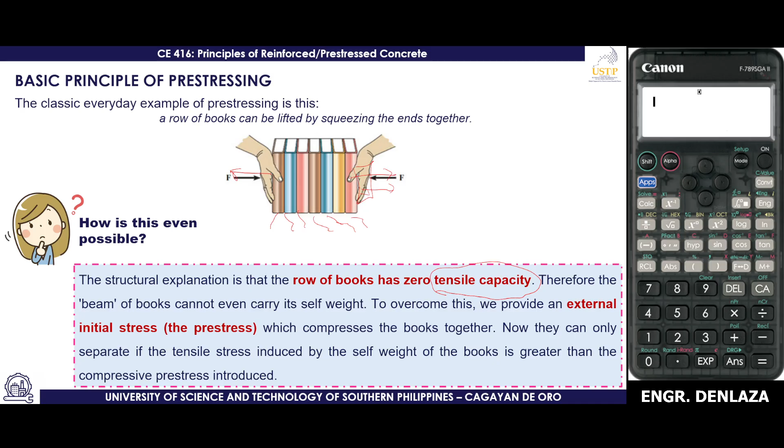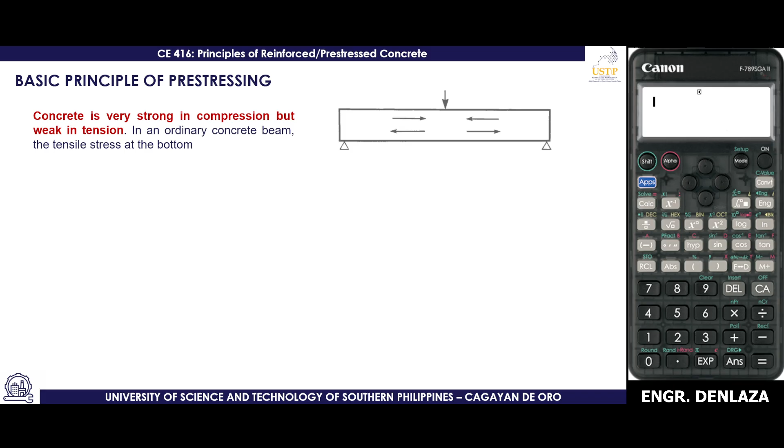We know that concrete is a very strong material that can resist compression, but it is basically weak in terms of its flexural capacity or tension. In an ordinary concrete beam, the tensile stress at the bottom looks like this, taken by standard steel reinforcement, and there is still cracking due to both bending and shear. This is the typical image of concrete subjected to different loads. So in pre-stressed concrete, because the pre-stressing keeps the concrete in compression, no cracking occurs. This is often preferable where durability is a concern.

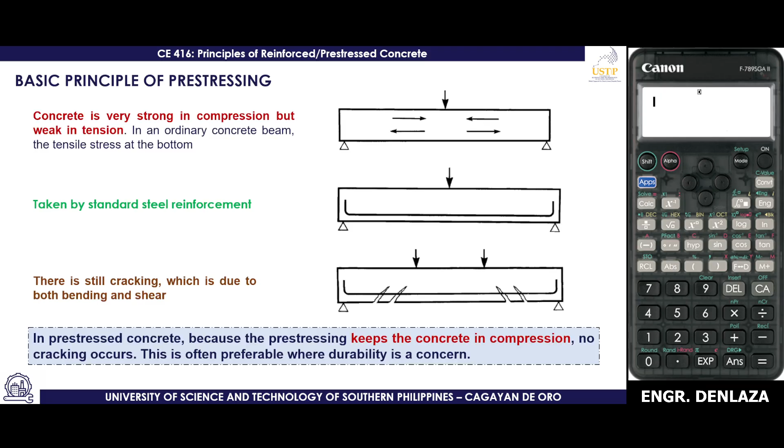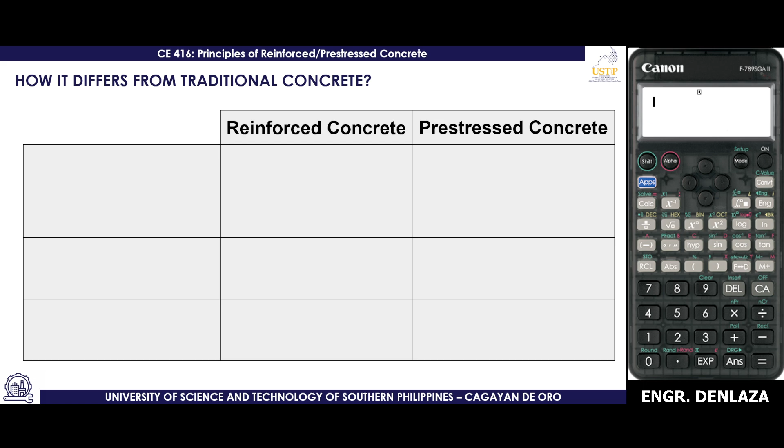So how does pre-stressed concrete differ from traditional concrete? I provided here a classical comparison. First is in terms of stress application, how the stresses are applied in reinforced concrete compared to pre-stressed concrete. In terms of stress application, rebars are used to resist tensile stresses, but the concrete itself still experiences tensile forces which can lead to cracking.

On the other hand, for pre-stressed concrete, the difference is that while reinforced concrete uses rebars, pre-stressed concrete also uses steel members, but they are now called tendons. The steel tendons are intentionally pre-tensioned or post-tensioned. You can actually pre-stress concrete prior to its curing, which is generically called pre-tensioned, or it can be pre-stressed after curing, which is called post-tensioned. That's the main difference.

So going back, the steel tendons are intentionally pre-tensioned or post-tensioned to create a compressive force in concrete, preventing cracks under normal conditions. On the other hand, in terms of structural efficiency, reinforced concrete requires shorter spans with larger member sizes.

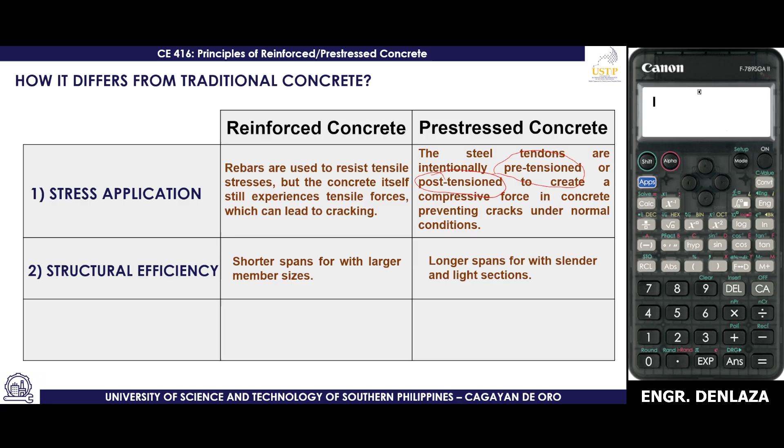In terms of load-bearing capacity, reinforced concrete, compared with traditional RC, begins to develop tensile cracks at relatively lower loads. So when you compare plain concrete to reinforced concrete, reinforced concrete is better. But when you compare traditional RC to pre-stressed concrete, pre-stressed concrete is better than RC—it allows the member to carry greater loads before cracking or failure occurs. So the hierarchy in terms of material is: plain concrete at the bottom, second is reinforced concrete, and third, topmost, is pre-stressed concrete.

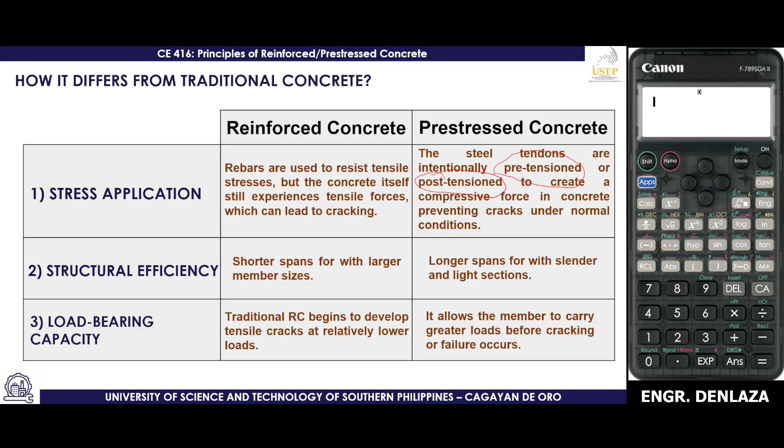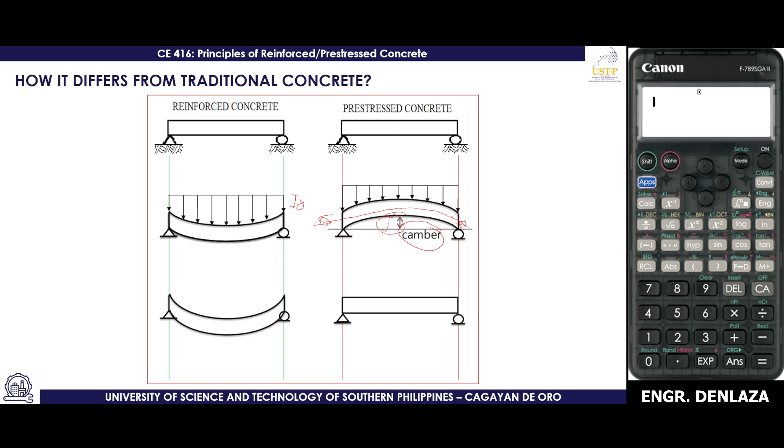So how does it differ from traditional concrete? If reinforced concrete is loaded, it tends to deflect. What is done with pre-stressed concrete is that it is cambered ahead of time, using tendons—pulled here and there, pushed in. After that, it now has a certain distance built in. If that pre-stressed concrete experiences a downward load, it balances out until it experiences little to no deflection, unlike traditional reinforced concrete. So that's the basic gist of the differences between RC and pre-stressed concrete.

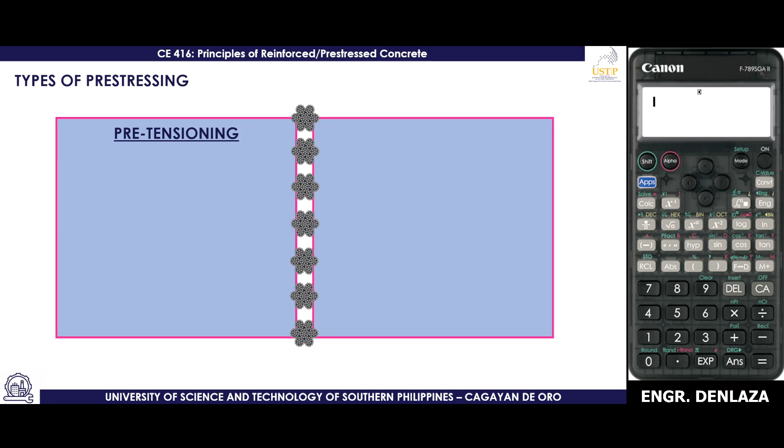Again, as I was saying, there are several types of pre-stressing, different kinds. There are two types of pre-stressing: pre-tensioning and post-tensioning.

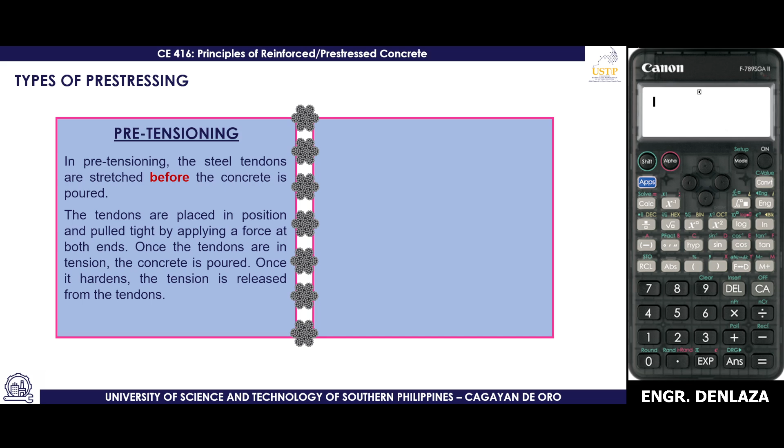In pretensioning, as I explained to you before, the steel tendons are stretched before the concrete is poured—that's the keyword, before. Before pouring or curing, the tendons are pre-tensioned. The tendons are placed in position and pulled tight by applying a force at both ends. Once the tendons are in tension, the concrete is poured, and once it hardens, the tension is released from the tendons.

On the other hand, post-tensioning is where the steel tendons are stretched after the concrete is poured—the keyword there is after. The steel tendons are placed in ducts or tubes within the concrete structure before the concrete is poured, but they are not tensioned until after the concrete has cured. Once the concrete has hardened, the tendons are pulled using hydraulic jacks and anchored to the concrete at both ends.

Actually, I have real experience handling pre-stressing. What I experienced being pre-stressed was piles. For the piles, we did post-tensioning. I also experienced pre-tensioning for girders on a bridge—so for post-tensioning it was piles, and I got to experience both, though I sometimes get confused between the experiences. Anyway, the gist of it is there are hydraulic jacks that pull until it reaches a point where it makes a 'boom' sound, and that's the time when the post-tensioning is done.

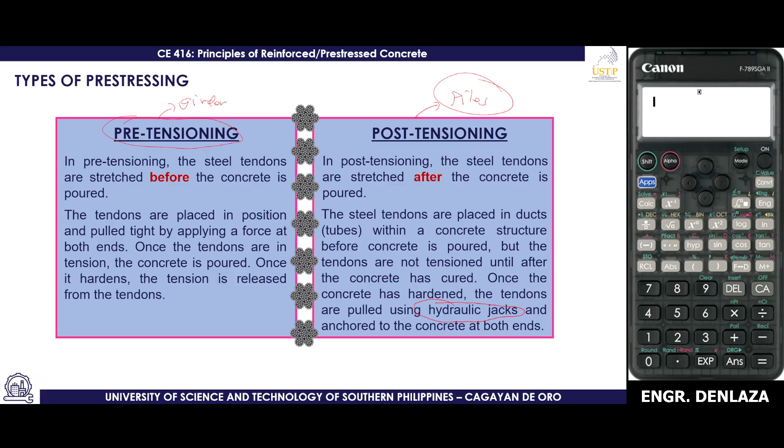In the next slides I'll show you images related to this, to explain these samples. For pre-tensioning, these are the parts: this is the pre-stressing bed where you pre-stress, typically shown as an image of a pile. There's the steel tendon, shown in red, which is actually pulled. Then there's the concrete that holds it, and a circular or square part which is the hydraulic jack that holds the tendon and locks it in place. So the process is: applying tension at the tendons, casting the concrete, transferring the pre-stress, then cutting the tendons. In real life, the tendons are actually very large.

As far as I can remember, I handled pre-stressing before, sa Molugan, El Salvador. Whenever you do pre-stress, usually before proceeding, you need to inspect the reinforcement, aside from the pile, the tendons, the cage reinforcements, and as well as the spiral itself. So during inspection, you check the spacing, the diameter, that's what it senses.

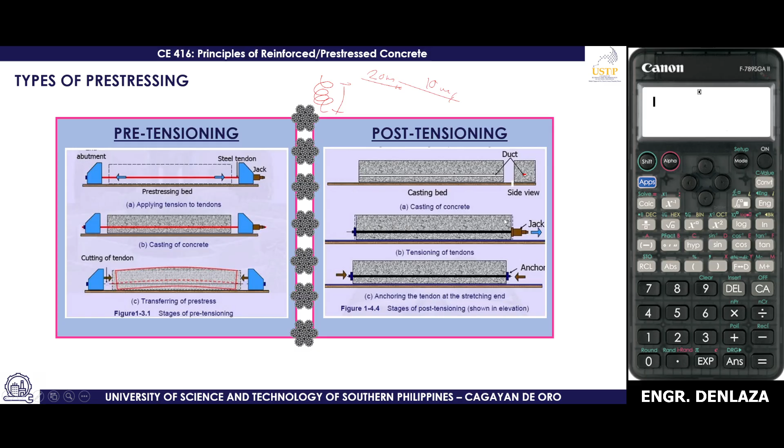In comparison to post tensioning, going back - there's a casting bed, then a duct where the tendon is inserted. Then casting of concrete, similar process, then jacking, etc. So that is the typical process of post tensioning.

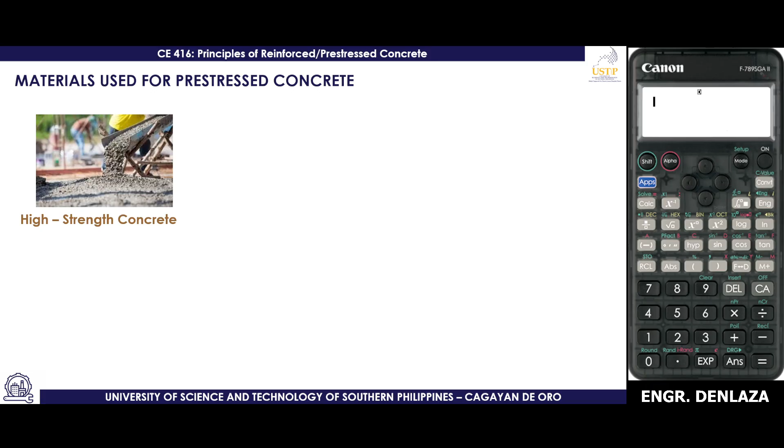Materials used for pre-stressed concrete: obviously high strength concrete, and then the tendons that I'm talking about. If you will ask me what a tendon looks like, here is its appearance.

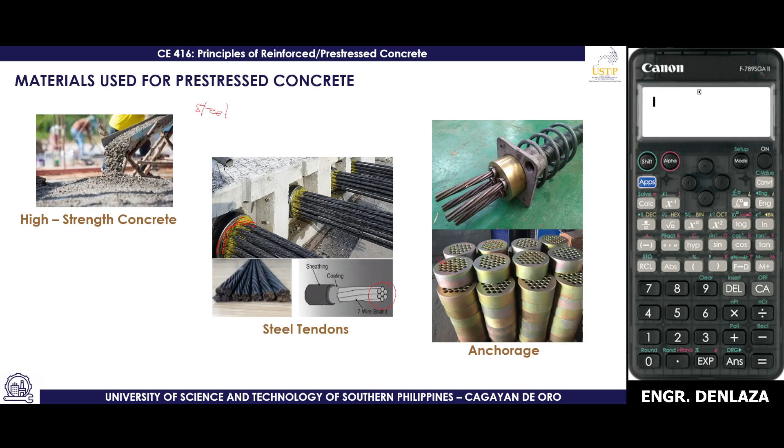So here are the parts: the tendons, depending on how many pieces are required, and then the coating and sheathing. Here are the other parts, the anchorage. The anchorage is where the tendons pass through, depending on the number of tendons required by the design. And then lastly is the grout.

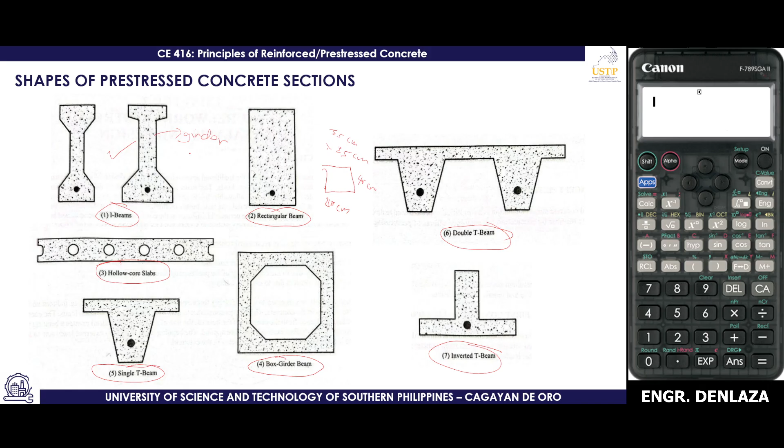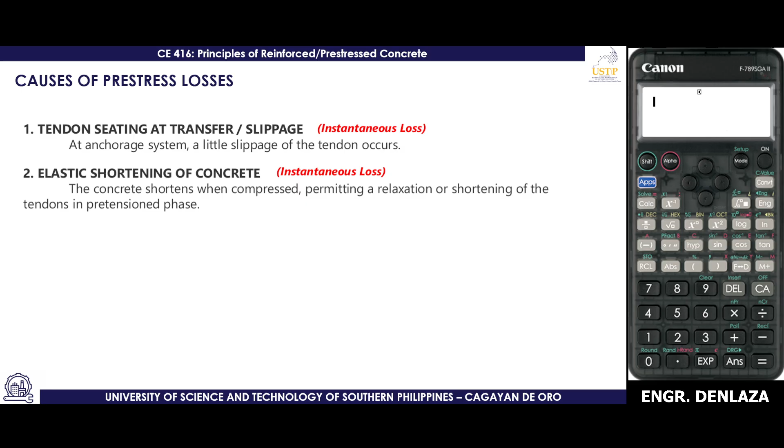We also have elastic shortening of concrete. The concrete shortens when compressed, permitting a relaxation or shortening of the tendons in the pre-tension phase. And then shrinkage, which is a time-dependent loss over a long time. Shrinkage loss is approximately 7% in pre-tension and 6% in post-tension.

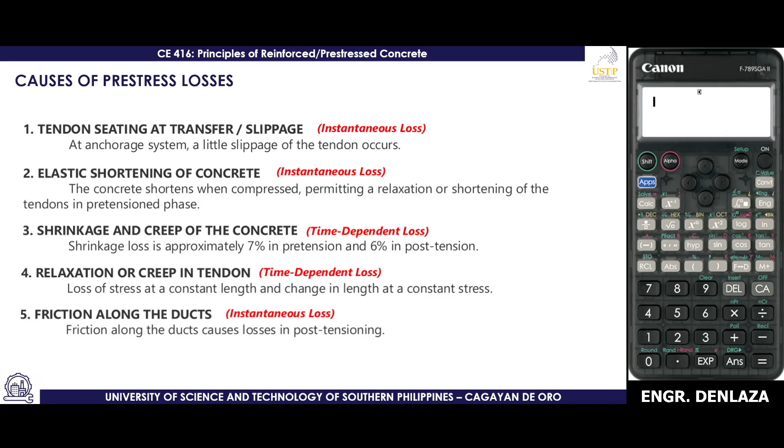We also have relaxation or creep in tendon, which is still time-dependent loss - loss of stress at a constant length and change in length at a constant stress. And lastly is friction along the ducts, which causes losses in post-tensioning.

There are several methods in analyzing and designing pre-stressed concrete. First is the basic concept: concrete fiber stresses are directly computed from the external forces applied to the concrete by longitudinal pre-stressing and the external transverse load. So if this is your rectangular beam, you have an axial load, and that axial load has a moment which is P times E, or eccentricity. Eccentricity by definition is the distance from the centroid to the location of where your actual load is acting.

So in a rectangular setting, we have the stress strain diagram on pre-stress. First is axial forces. The behavior here is that since this is axial, whenever it goes inward, downward, that's negative.

From the bottom of the fiber, that's negative, and at the top, that is positive. So you add the pre-stress force, and the pre-stress force has this mechanism wherein at the top fiber it's positive, and at the bottom fiber it's negative.

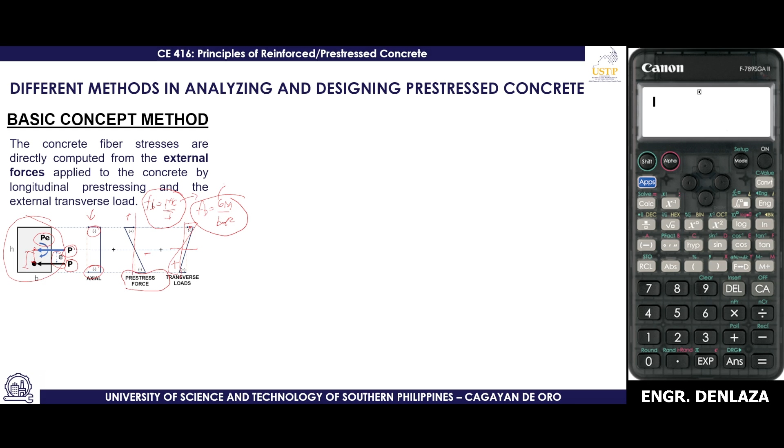So I hope you're familiar with the bending stress formula, which is MC over I. Since this is the generic equation applicable to rectangular and even non-rectangular sections, we also have what's called the bending stress formula, which is 6M over BD squared, a derived formula only applicable to rectangular beams.

So if you know that the problem you're solving is a rectangular beam, you can just use 6M over BD squared. But if it is a non-rectangular beam, you use MC over I, where moment times C, or the depth of the neutral axis, and I is the moment of inertia.

So one way of looking at this is my notation: basically if it's on the left side, it's positive, and if it's on the right side, it's negative. But again, it's reversed for pre-stress or transverse loads, because for pre-stress the top fiber is positive and the bottom is negative, while for transverse loads the bottom is positive and the top fiber is negative.

Then the other method is called the C-line method. It considers the line of action of the resultant compressive force in the concrete such that the induced stresses remain within allowable limits and tension is minimized or eliminated.

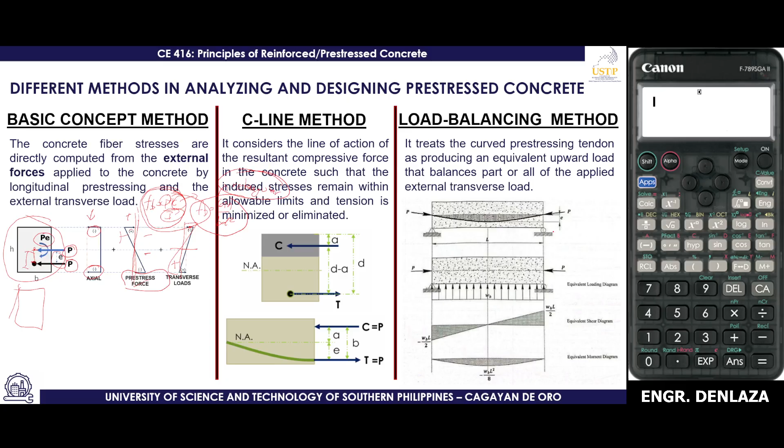So here's the diagram for that. And lastly is the load balancing method, where you have the diagram of your uniform load, then the shear diagram, and then the moment diagram. For board exam purposes, we'll focus on the basic concept method since that's the one that usually comes out in the board exam.

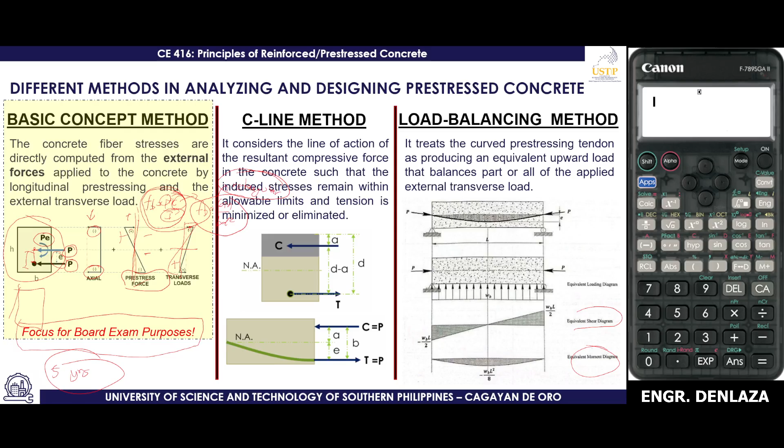So these are the ones. This has been coming up in the board exam for the last 5 years. So obviously if you take the boards, this topic will probably come up under RC.

So under the basic concept method, for pre-stress, the sign convention is: if it's going towards the perpendicular area, that is negative, or it indicates compression. If it's going away, that is positive, or tension.

So are you familiar with the smiley face? Basically, if it's smiling, positive at the bottom is tensile, and negative is compressive. That is the positive bending or the sagging. But if it's the other way, that is now the negative bending, where the top fiber is now positive, and the bottom fiber is now experiencing negative compressive stress.

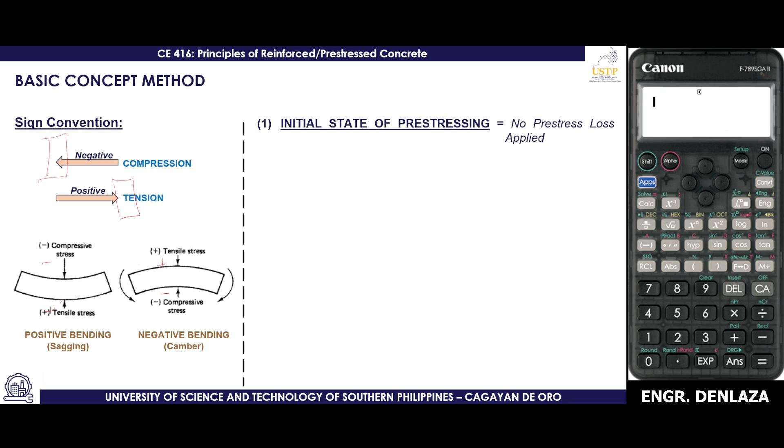So for the initial state of pre-stressing, there are actually two states, initial or the final state. In the initial state of pre-stressing, basically no loss of pre-stress has been applied yet. So all you have to do is just add the combined stress due to the pre-stress force plus the flexural stress due to beam weight, whenever it is applicable.

On the other hand, when it is in the final state of pre-stressing, the pre-stress loss is applied, so we add a multiplier where you take the percent loss and subtract it from 100% or 1. For example, if the pre-stress loss is just 8%, that's 1 minus 0.08.

So that's it. And take note, the combined stress due to pre-stress force is composed of the axial and also the pre-stress force. So these will just add up, depending on whether you are considering the top fiber or the bottom fiber.

Then that's the time that you will be adding for the transverse load, the flexural stress due to the service loads.

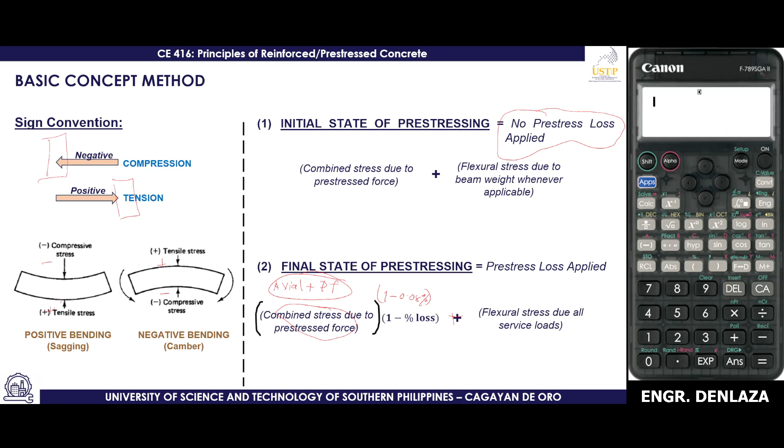Again, this is your beam, the neutral axis. This is where your axial load is applied, that's the P. So again, the distance coming from the centroid, right, since the centroid is at the middle, the distance from it to where you apply the P is what's called the eccentricity.

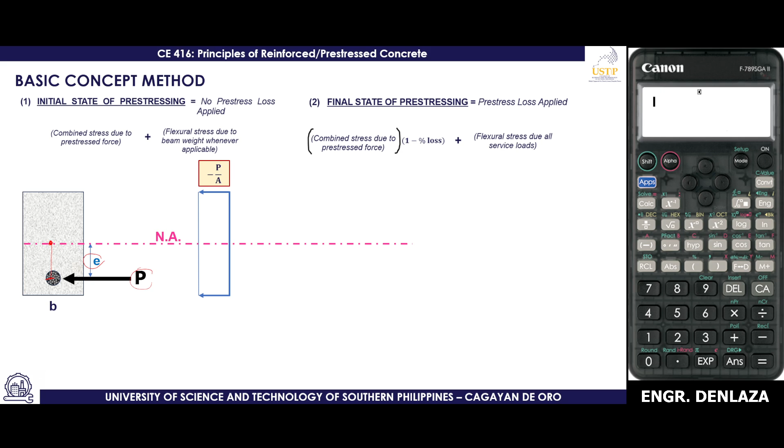For the eccentricity, this is the uniform distributed load allotted for the axial load itself. So again, the top fiber is now negative P over A, and the bottom fiber is also negative P over A.

This is just for axial loads. I'll just indicate, basta axial load ni siya. Axial loads. Now, pag moingon na pud ka og pre-stress loads, pre-stress na pud ni siya. Sa pre-stress loads, as I was saying, basta top fiber is positive and then bottom fiber is negative.

Now, as I was saying, di ba kay MC over I man to. So since in this diagram it is a rectangular beam, pwede ra na siya nga 6M over BD squared, if rectangular. Okay, ano siya, if it's rectangular. Kay if it's not, then mag MC over I pa gihapon mo.

And lastly, okay, so if you would notice, PE ang gigamit dire because P times eccentricity is just force times distance. Di ba? Force times distance. So force times distance is just basically moment, maura na siya, moment.

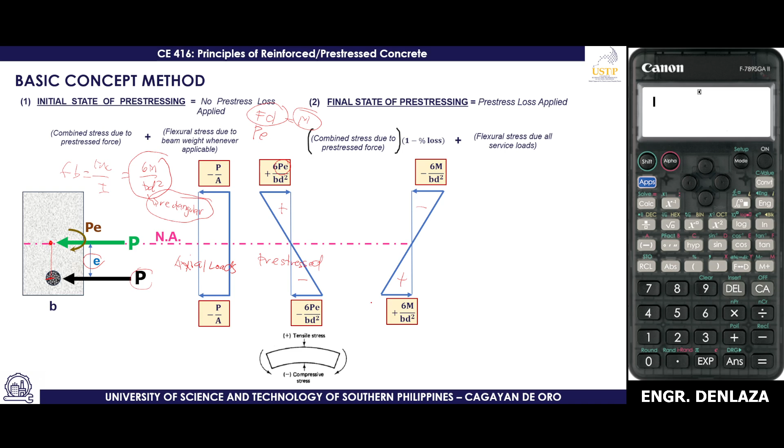So in this case, since this is positive, ang nasa taas, and then bottom is negative, so it is actually negative bending, si pre-stress. And lastly, in this case, this is now positive and this is negative, 6M over BD squared, pareha na siya, negative 6M over BD squared. And this is now positive ang iyahang bottom fiber and then negative iyahang top fiber.

So if you are interested in getting the total stress, all you have to do is just to add. If interested ka sa stress at the top, i-add lang nimo sila kani, kani, o kani, including the signs, okay? So the formula is just the stress at the top fiber is equals to negative P over A plus 6PE over BD squared minus 6M over BD squared.

If you will compare it to the bottom fiber, that's FBOT, or FBOT is negative P over A, kanina pwede mo i-add kani and kani. So that's negative P over A minus 6PE over BD squared plus 6M over BD squared.

So take note guys, this is only applicable for rectangular sections because ang atong gigamit diri is 6M over BD squared, which is the bending stress for rectangular beams, as well as here. Pero if it's not, then makagamit gud mo og equation nga MC over I. And take note, C over I, familiar di ba mo, that is also same sa section modulus nga I over C, so interchangeable. Take note lang mo kay makagamit na later po.

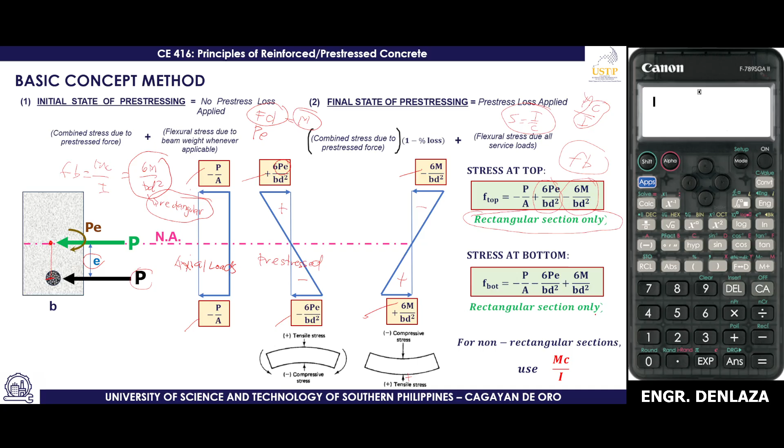Section modulus. Okay, as I was saying, for non-rectangular sections, you will have to use the MC over I nga formula.

So, basic concept method, tendon profiles: concentric tendon, which is nasa sa tunga, and then we also have eccentric tendon. So most of the time kani man o kani ang gagawa sa boards, guys, concentric tendon and as well as eccentric tendon. So pasabot na siya, eccentricity, ang iyang load kung asa siya nag-act is not in the geometric center. And then we also have parabolic tendon and we also have harped tendon, tendon or the pretension, post tension.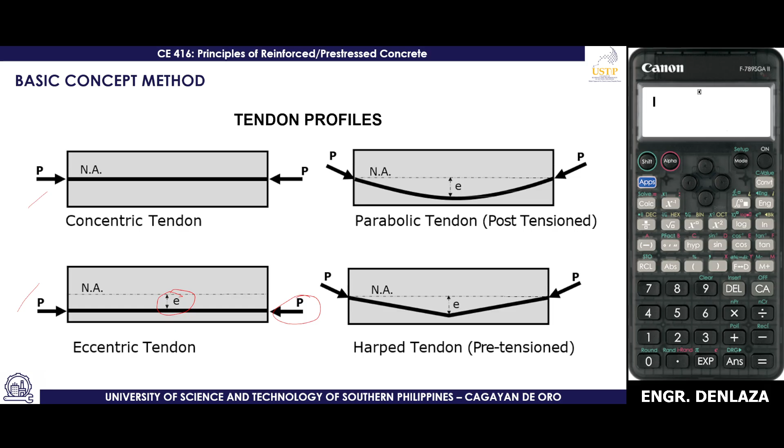So let's go to sample problems na, no? Okay, sample problems. Number one: calculate the top and bottom stresses felt by the pre-stressed concrete beam under initial state and final state, at midspan section. So the dead load is 24.8 kilonewton per meter and live load is 11.4 kilonewton per meter. The pre-stressing force is 1950 kN applied at 175 mm, that means away from the neutral axis, eccentricity day na siya. Assume 8%, take note, that is the pre-stress loss.

So that's 1 minus 8% day ang magamit unya if we are solving for the stress. And then take note, naa tay gihatag nga specific gravity of concrete. So SG is unitless. So since this is SG, kinahanglan tag unit weight of concrete, unit weight which is 9.81 kilonewton per meter cube. And then obviously you will have to multiply it with the specific gravity, and then since this is m cube, you will be needing an m squared.

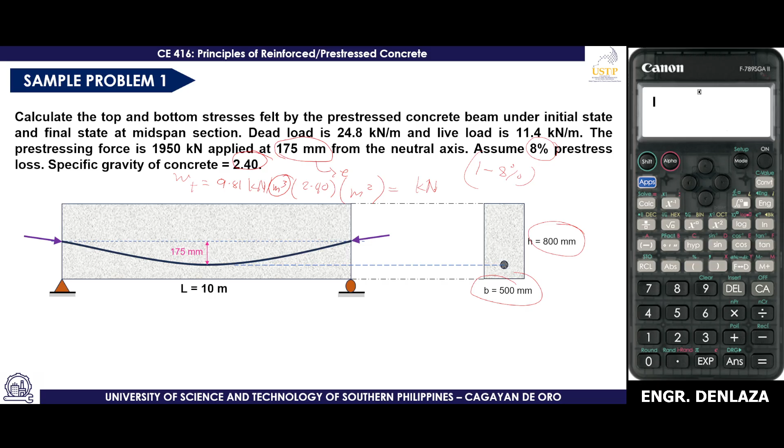So what is the m squared that can be used here? Obviously that's the base times height. Ina na lang siya in order for you to get the weight of the beam or the self weight in terms of its kilonewton per m na siya.

So the solution for the initial state, take note at the top fiber, this is the diagram. So that's negative P over A, positive 6PE over BD squared, and then negative 6M over BD squared.

The solution should still require you to get the weight of the beam, because we don't have any moments yet, we need the moment. If it's simply supported, that's just WL squared over 8. But the question is we don't have W, which is pertaining to the weight of the beam. How do we obtain the weight of the beam? It's just unit weight times SG times area of concrete, so the answer comes out in kilonewton per meter.

That's 9.81 times specific gravity times 0.5 meters and then 0.8 meters. Simplify that and you get 9.418.

So stress at the top is negative 1950. Take note, since this is in kilonewton, that's obviously times E3 or times 1,000, all over area, which is 500 times 800, plus 6 times 1950, and take note that's E3, and eccentricity of 175, times P, all over B times D squared, where D squared is the height.

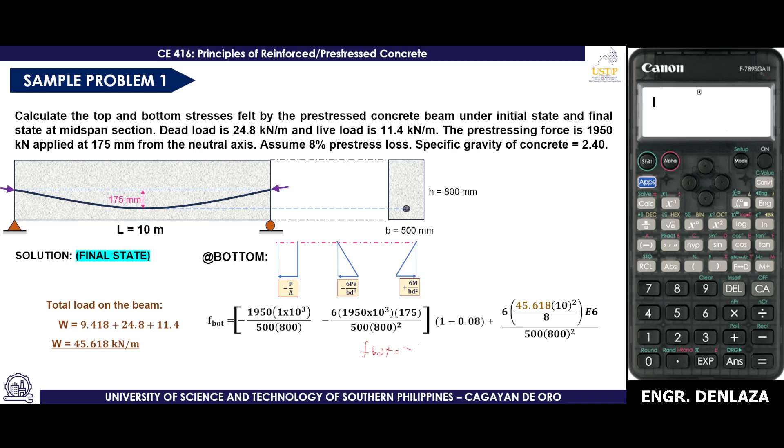But what you do is make it F bottom equals negative A, negative B, times 1 minus 0.08, plus C. So that's the equation for F bottom.

So take note that you should not forget the multipliers — since this is in kN, times E to the power of 3, or 1,000. But if it's in moment, take note it's E6, because that's 1,000,000. Right? Don't forget that.

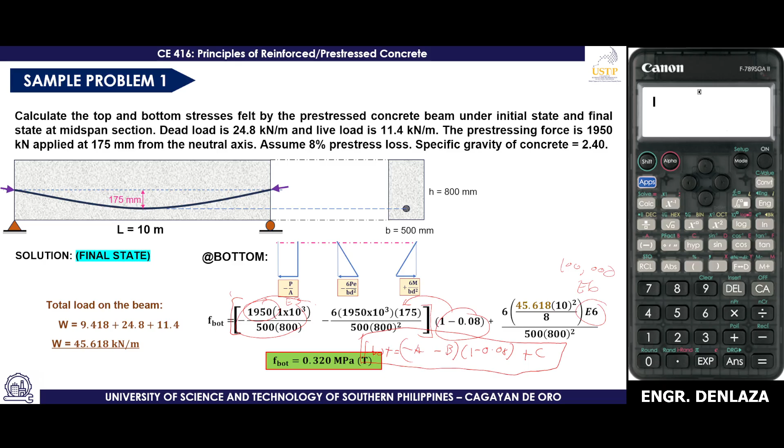So again, our final answer for the final state is 0.320 MPa in tension — it's positive, indicating tension.

Okay, that's it. Example number 2. So we have a beam with dimensions 400 by 750, and a length of 12.

The prestressing force is 2,100, applied 250 mm below the neutral axis. Okay, then we're given the unit weight.

So unlike before where specific gravity was given, now unit weight is given, so you just multiply it by the area in square meters, which in this case is 400 times 750.

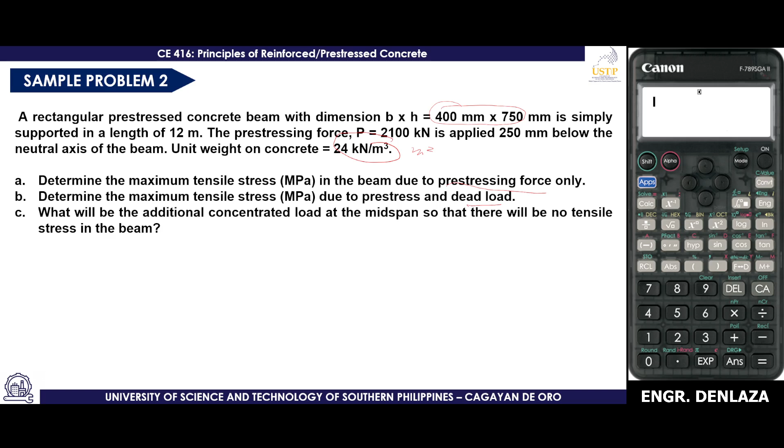What we need to find is the tensile stress at the beam due to the prestressing force, the initial prestress and dead load, and then what additional concentrated load at midspan is needed so there will be no tensile stress in the beam.

For the first problem, let's illustrate it. So this is the illustration with the load and the beam dimensions.

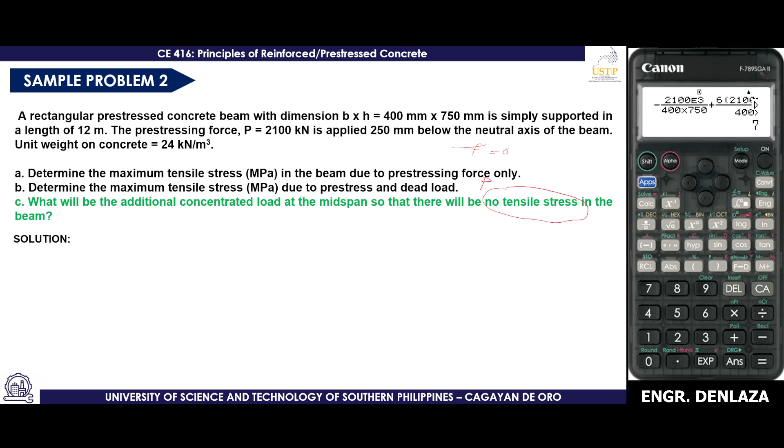So mga ulahi ang mga animation, pero as I was saying, ato na tong top nga equation ani. So nganong unknown man si M? Wait lang, ako lang ipakita sa inyo.

This is a maximum moment due to a point load. Pero pasabot, katong inyong nabaw-an nga M max is equals to WL squared over 8, this is only applicable if it is uniformly distributed. Pasabot ana, ingon ana na kay mga load, di ba? Ngayon ang kani nga problem tells us nga unsa man, point load lang ang present. So what is the maximum moment of a point load? That's PL over 4. So the maximum moment is PL over 4 of a concentrated load acting at the midspan.

Mao na siya. So as I was saying, dapat 0 si F-top. Kay mao may giingon sa problem nga 0 daw kuno si F-top. Let me just edit the animation earlier kay nagkalanrakas.

So as I was saying, we need to get this. So we need to determine why we have the maximum moment formula of a concentrated load, because your question is about additional concentrated load, which is present in the M variable here. So with F top equal to 0, substitute, simplify, and you should get 6 times M, which is P times 12, then over 4, and don't forget to multiply it with E6 because this is still a moment, then all over 400 times 750 squared, and you will get 44.25 kilonewton for this problem.

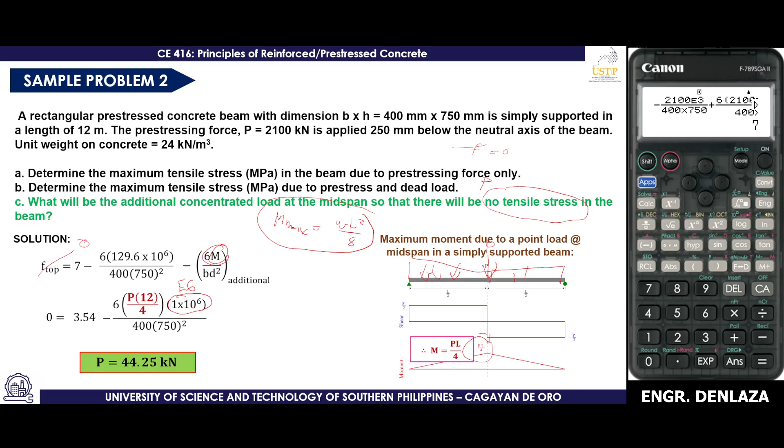Third problem: the section of a pre-stressed double T concrete floor joist is shown in the figure. The pre-stressing force in each T is 750, and since it's double T, that means 2 times 750, or 1,500 kilonewton. The unit weight of concrete is 23.5 kilonewton per cubic meter, and the simple span is L equals 8 meters.

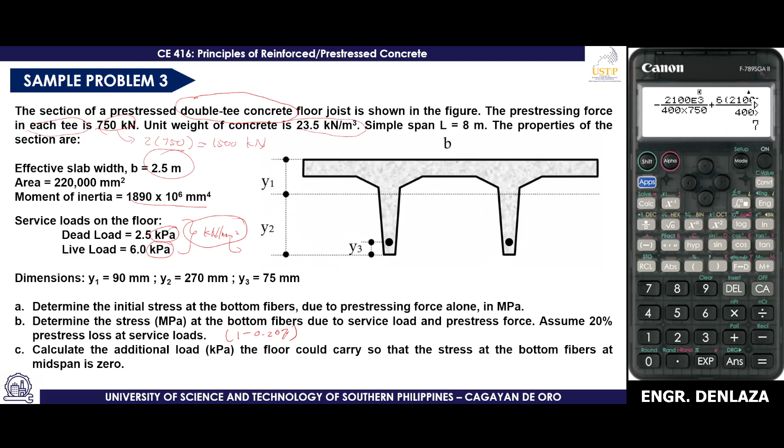We are to determine the initial stress at the bottom fibers due to pre-stressing force alone, and also the stress at the bottom fibers due to service load and pre-stress force, assuming there is a 20% pre-stress loss at service load. That means you multiply 1 minus 0.2, or 20%, by your pre-stressing load to get the actual load. Then calculate the additional load the floor could carry so that the stress at the bottom fiber at midspan is 0. So we substitute those values into y1.

So as you can see, this is now our new dimension. Take note, since it is acting here, our eccentricity is just 270 minus 75, which is 195 from the bottom fiber. Let's take note of our stress-strain diagram. F-bottom is what we're interested in, since that's the question. So that's negative PA, negative 6PE, initial stress, all over BD squared. Let's focus here.

So that's negative PA. Take note, obviously we cannot use this equation because this is not a rectangular beam. Instead, since we already have values for C and for inertia I, we can use this formula instead.

Wait, there seems to be some distortion happening. Wait, it's not deleted. Let me just edit this one.

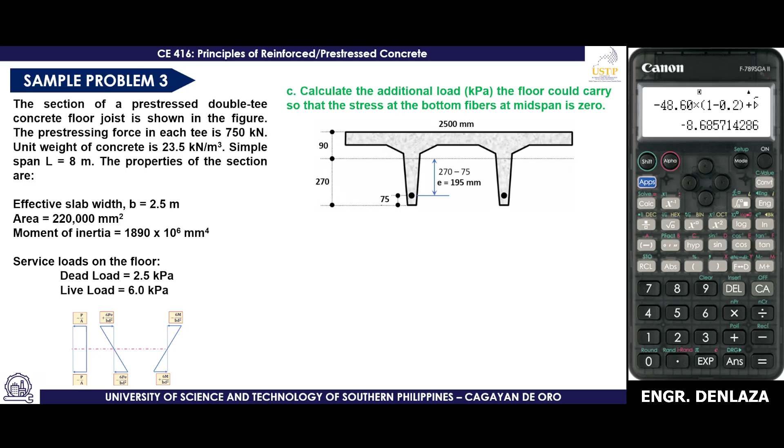So para positive itong ma-display, you just have to indicate the C, which is indicating that it is compression. Then lastly, calculate the additional load the floor could carry so that the stress at the bottom fibers at midspan is 0.

Additional moment at bottom stress to be 0 at midspan, F bot equals negative 8.69 plus MC over I. So, M, 270. Take note na lang ani, ayaw mo kalimot, butang og E6 ani. So, M E6 times 270 over 1890 E6 para makuha ninyo ang value. Dapat na siya E6 diri. I-edit na lang nako.

And then additional uniform load, WL squared over 8, that's W, 7.60, and that's kilonewton per M. Kinahanglan mong kag-additional load nga KPA siya. Okay, so that's gonna be 7.60. The unit should be KPA, that's kilonewton per M over M. So obviously, my numerator, so that's why M squared. Okay, so that's KPA. Gets.

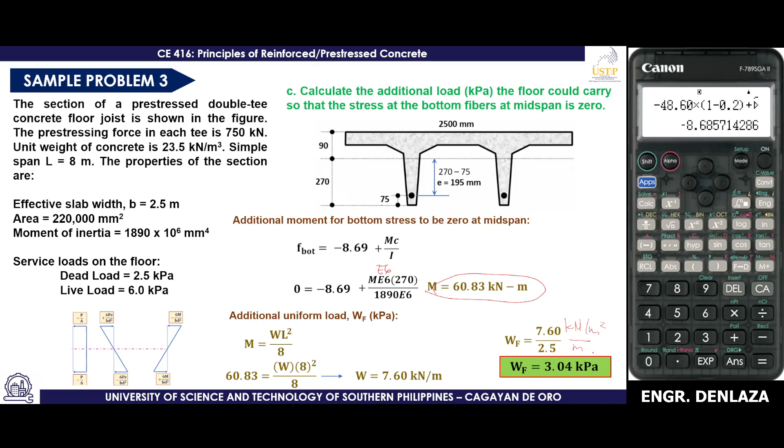Okay, sample problem 4 na ta guys. Last 2 na lang. Last 2 problems, sorry. Maburo mo tayo din, eh. Wait lang, kaya naglag.

So, naatay pre-stress sa hollow core slab. Use SE library flooring. Naa siya overall span of 10M. Naa siya pre-stress loss of 15%. And then we also have A 1.5, B for the depth, it's 250. And then cross-sectional area, take note na lang tayo bagong value diri, it's the section modulus.

As I was saying earlier, the bending stress is actually MC over I. And then take note, familiar C over I. This is actually similar sa section modulus SX, which is I over C. So, if i-flip nimo, pwede na siya magamit. So, technically, kung naa tay value for section modulus diri, pwede na other term din niya, FB is equals to M over S. Other formula for bending stress.

So, I think na-encounter na ba ninyo? I think sa MDB, na-encounter naman ninyo sa MDB. And I think makarepeat pa pod mo ani sa steel design.

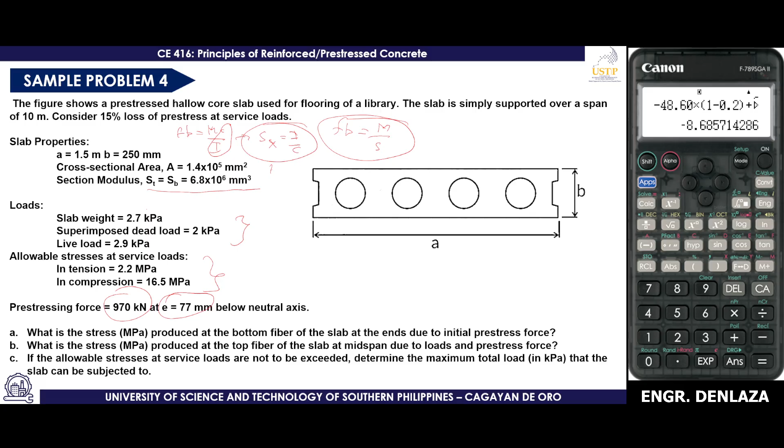Similar na sila. So, naa tay superimposed loads, then allowable service loads. Take note, naa tay pre-stressing force at 970, naa pod tay eccentricity to be 77 mm. You are to find the stress produced at the bottom fiber of the slab at the ends due to initial pre-stress force, that's the actual pre-stress. And then at top fiber pod at mid-span due to loads and pre-stress force. And then if allowable stresses at service loads are not to be exceeded, determine the maximum total load that the slab can be subjected to.

Okay, F bot due to pre-stress, that's negative PA plus MC over I, and that's 970 E3 all over 1.4 E5, given na siya sa problem guys. And then minus 970 E3 times 77, KP times E or moment, all over S or the section modulus. So kani siya, 'di ba, P, and then kani siya E, so that pertains to moment. And then this is the section modulus. Ito na lang natong ST, kay para dili siya libog. Simplify na, kay negative 17.91 MPa, okay?

What is the stress produced at the top fiber of the slab due to loads and pre-stress force? Na-solve na tayo ganiha ang pre-stress, pero we have to multiply that with the loss of pre-stress. Then, since this is top, negative ang iyang top due to service loads.

Okay, take note of these service loads. Let's see, how many are there? 2.7 times 1.5 plus 2 times 1.5 plus 2.9 times 1.5.

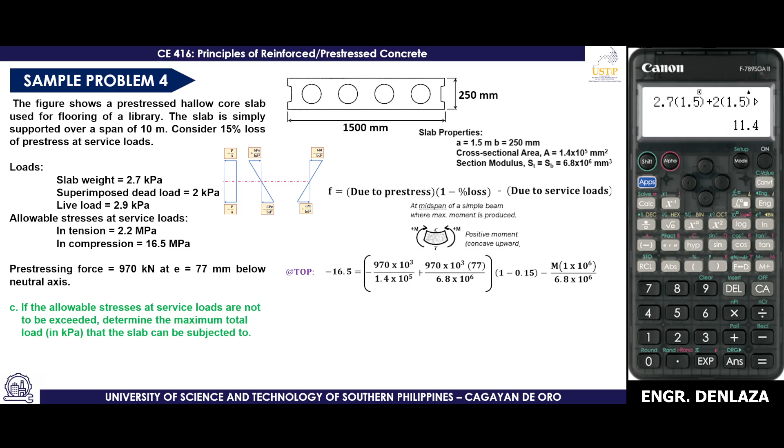Okay, so since we can get M from this, it's PE right? So that's 135.64. Bottom, 2.2 is tension, bottom fiber, so here's where you look. Negative 970E3 over A minus 6PE all over S multiplied by pre-stress loss, then positive 6M over BD squared. So 118.49 governs since it's smaller.

Now with the smaller value, we know that's WL squared over 8. The animation is a bit late. Okay, that's 118.49 equals WL squared over 8, simplified to 6.32, that's kPa.

Wait lang, let's check the signs. This is not kPa, it's kilonewton per meter. This is kNm and this is m. So if this is kilonewton per meter, it cancels out. Because it's a uniform load. Oh okay, I was surprised there was a condition that it's kPa, so I can erase that. There was a condition that the unit is kPa - because if it's not kPa, we multiply by 1.5 to get kilonewton per m.

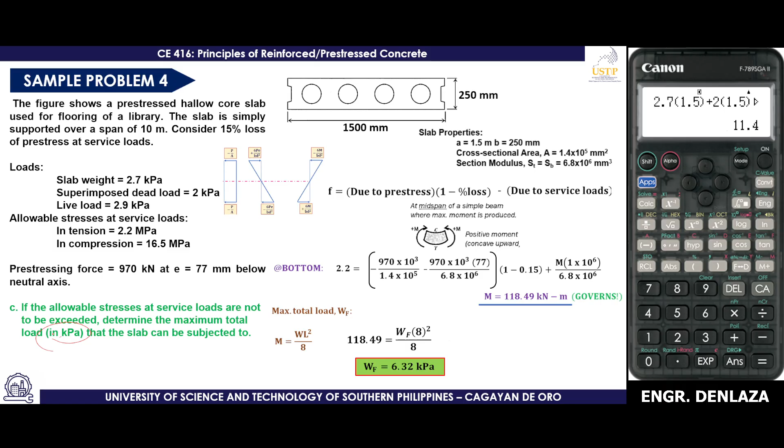So, last problem: we have a cantilever beam 6m long, 250mm wide, 600mm deep, with a distributed load of 5, and a pre-tension of 12mm diameter strands causing a final pre-stress force of 540.

Okay, then what else is this about? It's about FC prime. Determine the resulting stress at the top fiber of the beam at the free end if the center of gravity of the strands coincides with the centroid of the section. So the explanation here is that the CG coincides with the centroid of your section, meaning your eccentricity is basically 0.

So the formula is PE over BD squared - here's BD squared - and technically with E equal to 0, so whatever you multiply with this term automatically cancels out to 0. So the tendency here is that P over A is what we'll use now. Alright, let's just check.

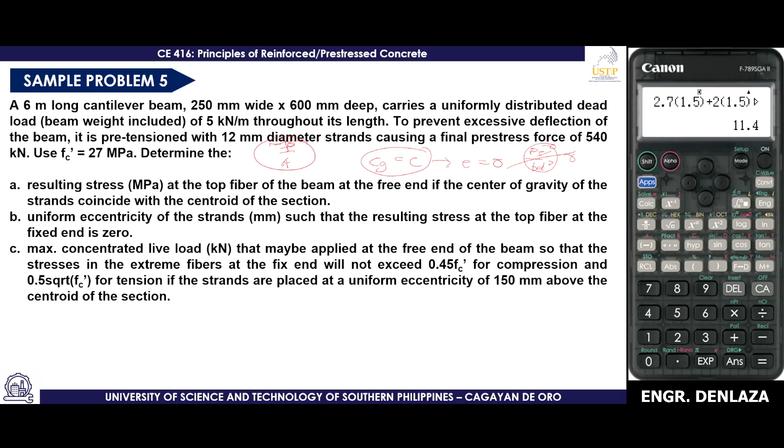Then, uniform eccentricity of the strand such that the resulting stress at the top fiber of the fixed end is 0, and maximum concentrated live load that may be applied at the free end of the beam so that the stress in the extreme fibers at the fixed end will not exceed 0.45 of your FC prime for compression and 0.5 square root of FC prime for tension, if the strands are placed at a uniform eccentricity of 150 above the centroid of the section.

So if you visualize this problem, it's like we have a uniform distributed load of 5 kNm, cantilever beam 6m. Your load is applied at the center, so that basically tells us your eccentricity is zero. So if that's the case, automatically whatever equation or term that has eccentricity becomes zero. And this M, right? You know that's PE.

So automatic zero. So the term remains. That's 540, which is the pre-stress force E3 250 times 600. Simplify, that's 3.6 MPa compression. This is already the final answer for this problem.

Next, uniform eccentricity of the strand such that the resulting stress at the top fiber at the fixed end is zero. So you'll see the shape if you deflect the cantilever beam. So it's saying uniform eccentricity. What you're solving for is the eccentricity such that the resulting stress at the top and bottom fiber at the fixed end is zero. So this portion.